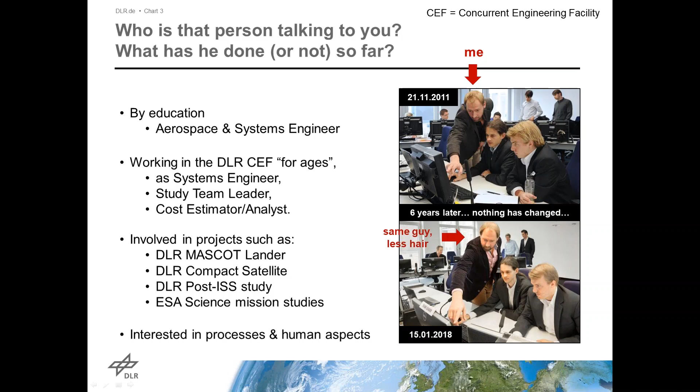Personally, I participated in approximately 50 studies in different roles, such as system engineering, team leading, or moderating, and as just said, more and more also cost estimation. And projects which I had the luck and honor to participate in include, for instance, the MASCOT landing package, which ended up being part of the JAXA Hayabusa 2 mission, which landed on October 3, 2018, which was German Unification Day, basically. And since 2 of my research interests are also engineering processes and human interactions, I sometimes feel inclined to compile such observation-based papers to look not only on the technical side, but also on the people-related aspects.

A few words on the German Aerospace Center, or in short, DLR, for those who are not fully aware of this organization. Here's a map of Germany with all DLR sites and centers presented. The number is constantly growing. DLR is somewhat similar to NASA, but smaller, of course, and comprises the German Space Administration, which is actually only a small part of it, and many R&D centers dealing not only with space, but also aeronautics, transportation, energy, digitalization, and security. We have more than 9,000 employees, more or less, and about 150 of them are sitting here in northern Germany, in Bremen, where the Space System Institute is located.

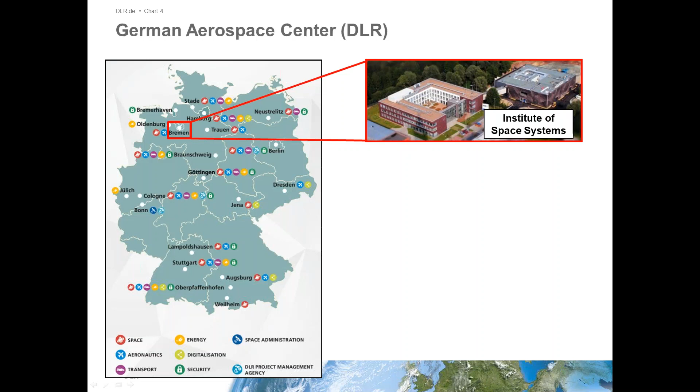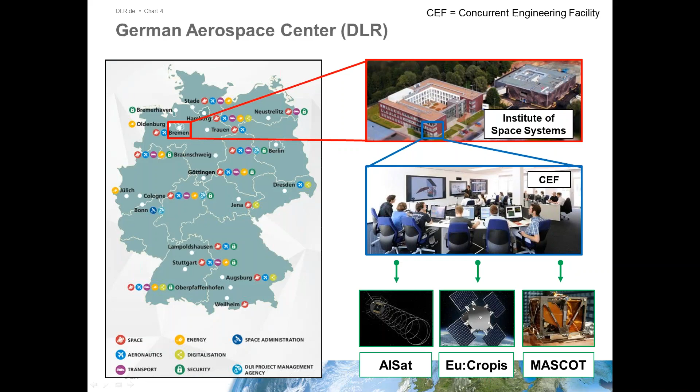And this place also then hosts the Concurrent Engineering Facility, which looks basically like an operations center, but it's mainly used for mission definition studies and not at all for launch or satellite operations. Not all of our projects use the CEF, but many do. Several of these studies aim to investigate future potential missions, to identify, for instance, feasibilities or come up with a preliminary design. Some projects end after such a study, since they lost competition against other missions. Some end due to lack of funding. Others are put on hold because they're too fancy to realize right now. But some turn into reality, such as the presented here, AISat, the Eu:CROPIS compact satellite, or the just mentioned MASCOT landing package.

But well, why setting up a CEF, and also why using it? As many others did before us, especially in NASA and ESA, we also wanted to reduce the, let's say, typical communication barriers, which are unfortunately standard during regular office-to-office communication. There's also plenty of definitions about concurrent engineering as applied in space engineering, but in short, it's no magic.

The idea is essentially to put everyone into one place, co-located, or these days maybe also virtually, and establish a structured and moderated communication process in which all subject matter experts or domains should mutually exchange their design progress to the entire team. It also facilitates parallel working while maintaining a clear share of responsibilities, and it's very useful in early stages, but can also be applied to later phases to a certain extent.

And well, why are we doing this? As you know, space systems tend to be very complex, often unique products. They're also comparably expensive. And to build the product right, and also actually to build the right product, you should involve everyone in the design process right from the start, and make sure that there's a common understanding and also a common data set to be used by everyone.

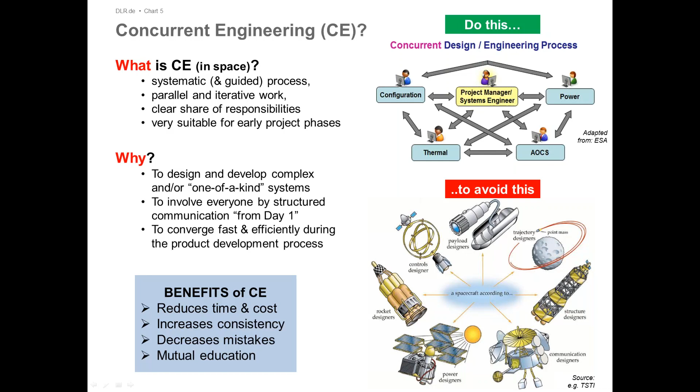And in the end, it all comes down to communication, which then leads to a reduction of time and costs and increased consistency, less mistakes, and also a nice side effect, mutual education. So you learn a lot from others.

On our side here at DLR, it is done by considering the so-called 4 major elements or legs of concurrent engineering, which is the people, of course. It's the most important one. It includes the customer, the design teams, and everyone who has a relevant stake in that mission. It's supported by a guided process, which is managed by the so-called team leader or moderator.

It makes use of an infrastructure. In our case, it's the CEF. And also very important, a central data model, which is a tool or software which acts as a single source of truth and ensures a smooth data exchange amongst the disciplines.

The CE study itself, which on DLR side usually lasts about 1 full week, so let's say average working week, is the central part of the overall study or overall activity, which is framed then by an initiation and preparation phase, in which expectations, requirements, and first design options are defined by the core team, not to waste time of everyone else, and also by a later post-processing phase in which the CE study results are harmonized and documented.

The study phase itself consists of several plenary sessions where the entire team participates in the discussions, and also so-called offline sessions during which the team members can work on their own design, do their homework, so to speak, or discuss particular issues and trades in smaller groups.

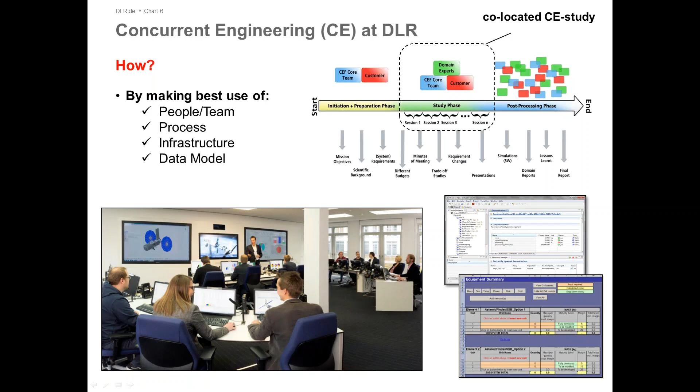For the data model, there's plenty of options. There's commercially available ones, company-tailored ones, some provided by agencies, sometimes self-made in Excel or using more sophisticated software. But the overall goal for all of them is to ensure that everyone works with the latest set of data and that you have basically also simultaneous access to that data.

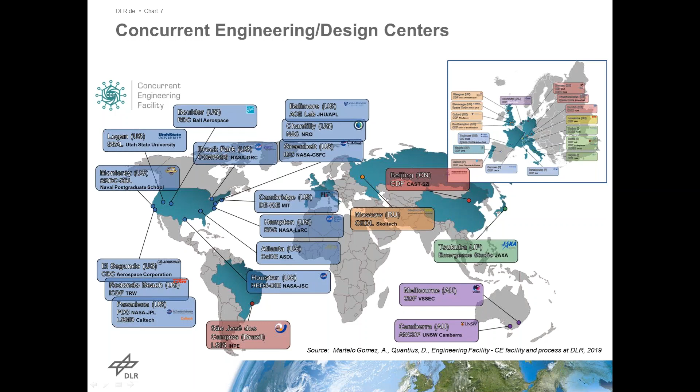Of course, we're not the only ones in the spacecraft community with such an environment. There's plenty of other concurrent design centers worldwide with industries, agencies, R&D institutions, and universities using them. And also here, the number is growing. This is a map one of my colleagues put together, which I'm allowed to share with you. I guess maybe some of you have already worked within such an environment or have at least heard of or seen one.

Since every entity adapts the concurrent engineering methodology to their own needs, there's also many different approaches. We at DLR use it for several applications, project stage-wise, very early, not so early, option selections, or point design. But for all of them, we typically follow a 1-week approach with 5 plenary sessions, which often represent 5 design iterations.

The European Space Agency, for instance, in their concurrent design facility, they are spreading the sessions over the course of several months, with sometimes having only 1 or 2 sessions a week, which gives them in total a bit more time. And there's, for instance, the NASA Team X, one of the first applying this approach at Caltech JPL, who do, from my point of view, super condensed 3-day studies with several iterations a day.

And all of them have pros and cons in terms of required preparation status, tool or people availability, required skills, and so on. And what I can say about our approach, it's very efficient. The people, particularly the customer, are usually very happy. But I have to admit, it's also a very, very dense exercise.

So how is cost estimating done in the concurrent engineering environment? There's also difference amongst entities. Some, of course, keep the results and the work in progress confidential. We, for instance, talk about it a bit more frankly and more transparently, since we're an R&D institute. But even within one company, details of the process vary depending on the team, the partners, project type.

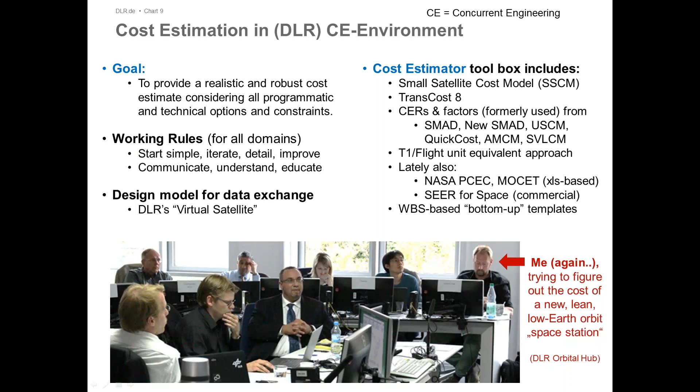Some are also very obvious, and maybe there's sometimes not much you can really do about it. But the key message I would like to bring across is the awareness. So you have to know your enemy. So the first one is wrong expectations. This is mainly related to the customers or the major stakeholders, because depending on their background and interest, the expectation of the study outcome could be significantly different from person to person.

Depending who the customer is, a project lead, a department head, or a business manager, they have, of course, different objectives. Maybe it's just a cost comparison, a detailed cost breakdown, or just a ROM idea of the cost, or something more elaborated. Normally during the preparation phase, it should be already clarified what can be done or not. But once everyone is in the same room and the study starts, I observe that the opinions might change a lot. And in most cases, all people in the end want to have a single number to take home.

So let's say this costs 100 million euros or dollars. And sometimes even before the study starts, although the design information is completely immature at that stage. There's also often the desire for bottom-up estimates or engineering build-ups. But besides the, let's say, data availability or non-availability for such bottom-up estimates, the time needed to actually set up such an estimate is totally underestimated. There's often the understanding that everyone adds their input and voilà, here's the results. Of course, this can't work.

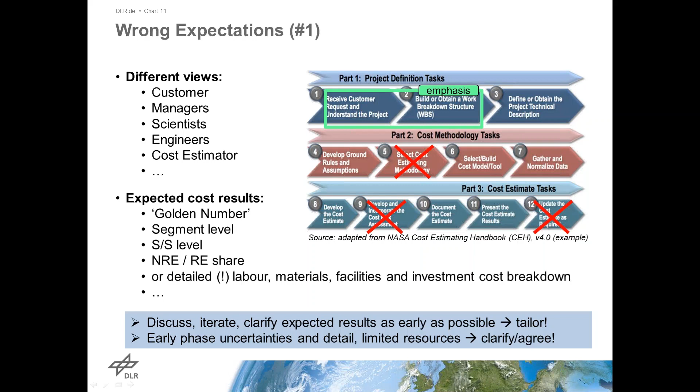So the next issue is an international multidisciplinary team. This is actually a twofold problem. First, especially in DLR and European entities, there's many nationalities within the teams. In our institute, for instance, we have 150 people. We have also 25 nations represented. This is a strong boost of creativity, I have to say, but also it comes with the burden of having to deal with different backgrounds, different personalities, communication styles, and experiences.

This really requires an experienced moderator, or makes them really mandatory, I think. The second aspect is if the outcome of the study also includes project planning and not only a technical assessment, as is the case, for instance, for a bid preparation or any other proposal activity. The question of the industry consortium enters the game.

On top of this, salary differences are also important, especially between Northern and Southern European countries. Although most of us have the same currency, it varies a lot, up to a factor of 3, comparing maybe Germany to Greece, for example. And this requires careful assessment with respect to labor rates and costs, which is actually not often well reflected in most cost estimation relationships, so-called CERs, or any other models.

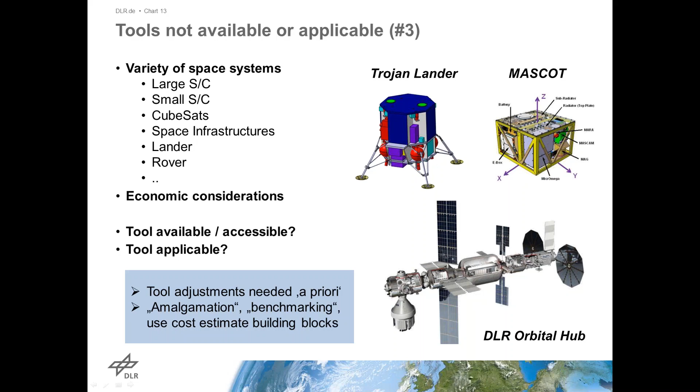Specific, or let's say ROM costs. To have an initial feeling on the ballpark cost range, using cost rates is not uncommon. During a concurrent engineering study, there's typically a day 1 or even a day 0 task. Factors such as cost per mass, for instance, can be used as a reference for sanity checks or as an initial guideline. But these numbers are sometimes subject to misunderstandings.

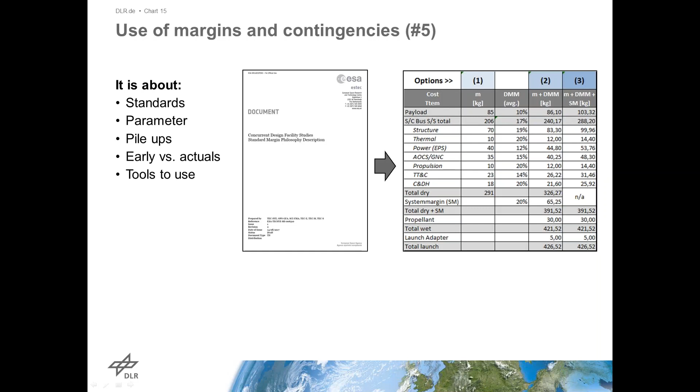Since most tools are based on actual data, shouldn't you then use the more likely actual data, or the worst case as your inputs? This would then mean that you somehow should include the 20% as well, right? So in the table on the right side, there's another column with a 20% system margin redistributed over all the subsystem masses, which is then a common input for the parametric cost models.

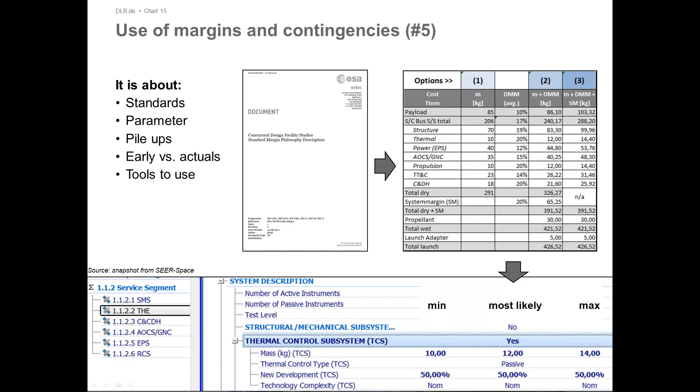And if this might be agreed, then the next question is where to actually put the data if several options exist. So if you take that column, where do you put it? There's a snapshot here from a commercial tool we're using. You somehow have to define in the beginning, and make clear during the tool selection process, which should take place prior to the study phase, the use and application of technical margins, not only for mass but also for other parameters, and then how to use them amongst tools and models. And this should be clear, documented, and definitely agreed on, because during these rapid and iterative estimation loops within the concurrent engineering environment, these details may be completely overlooked in the end.

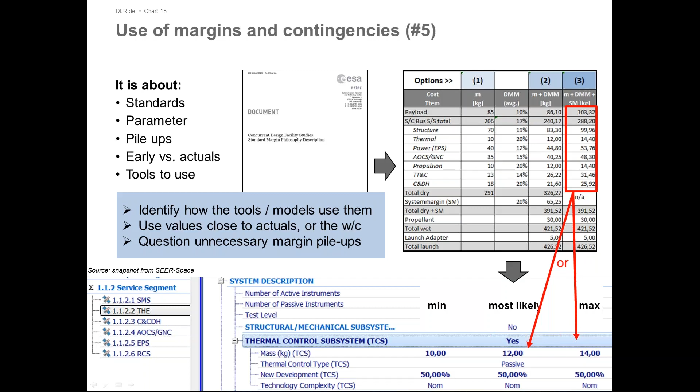Heritage and complexity factors. Sometimes they're part of a tool, sometimes they're not. Moreover, both might be very subjective and could be defined by several different parameters or design considerations, such as mass or number of units, type of units, maybe something like just software or mission aspects. On the right here, you can see an example of some compact class satellites launched by DLR or not in the last 20 years, which were supported by different partners, contractors, and also led by different teams or even institutes.

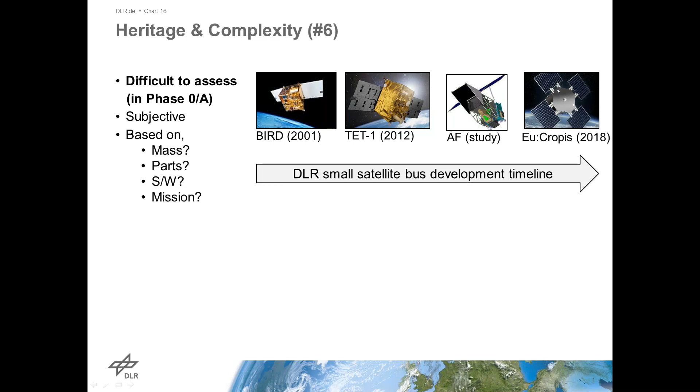For the next potential satellite in that line, how do you, from the technical and also from the cost side, assess how heritage and complexity is captured within the tool? Well, it's a very early stage, and at what level do you do this? So do you do this on system mass, on subsystem mass? How do you basically reuse the experience from a project 20 years ago in a current project? It's a very, very subjective assessment.

Again, no similar snapshot here. As said, some tools really account for this already, but surprisingly the cost impact might also be quite different. As an example, one parametric tool we use applies a factor in the 1.3 range when going from an average heritage of 50% to a fully new system. Another one uses a factor of more than 2.5. That's quite a difference.

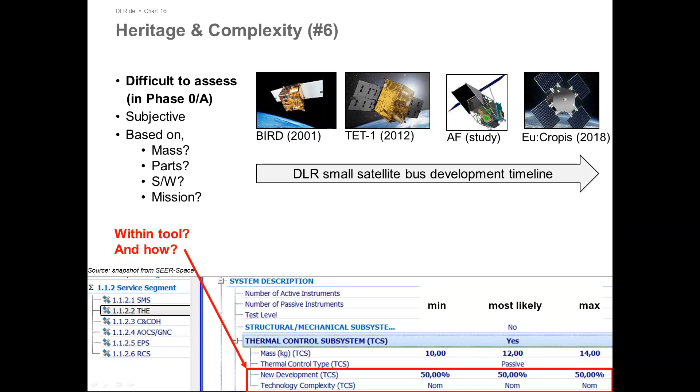In the end, you need to know your CER sensitivity to really make careful assessments. Furthermore, the input mask of the tool: sometimes they're asking for reuse percentages, other ones for percentage of new design, which is exactly the opposite. So you also shouldn't get confused with that in the hectic concurrent engineering environment.

So anyway, my experience is to save this rather subjective adaptation to the last moment, and until then make clear that this still needs to be accounted for, and that you include this in your assumptions basically at the end of the estimation process.

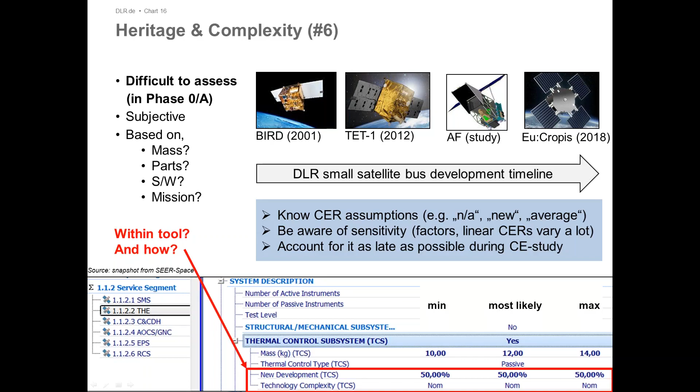So here we are. It's basically the central problem, the price you pay: lack of time. It's actually not really a specific problem, but rather the mother of all problems. There's also not much specific to tell, as it's self-explaining. Lack of time is a problem for all participating domains, but the cost estimator, unfortunately, is one of the last in the data utilization chain, and you might get into trouble before the last study session starts and finishes.

It's also clear that within 1 week, you can't really go through the full NASA, ICEAA, or DLR cost estimation process to full extent, which also might not be necessary given the early stage or the premature data. But still, there's a lot of iterations you have to go through.

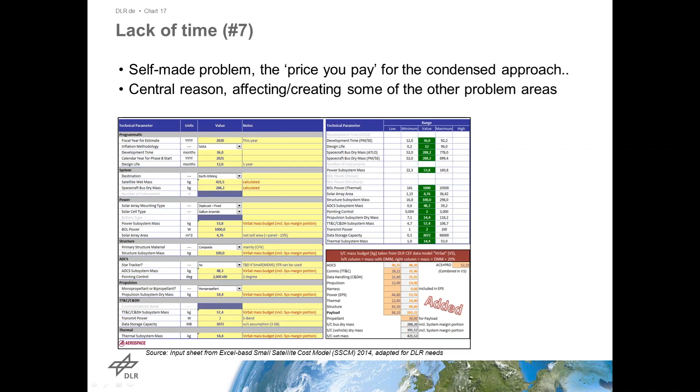On this slide, you can see another example. This time it's an input sheet of the Excel-based Small Satellite Cost Model 2014. It includes a self-made internal data input box on the lower right, which is basically a representation of the CEF central data model. And it includes also a total mass cross-check.

From there, the values are linked into the actual SSCM input sheet, and this might help to reduce some time, inconsistencies, or mistakes. It's just a very easy and simple example of how the time problem could be reduced a little bit with very easy and simple tool adaptations to iterate as quickly as possible.

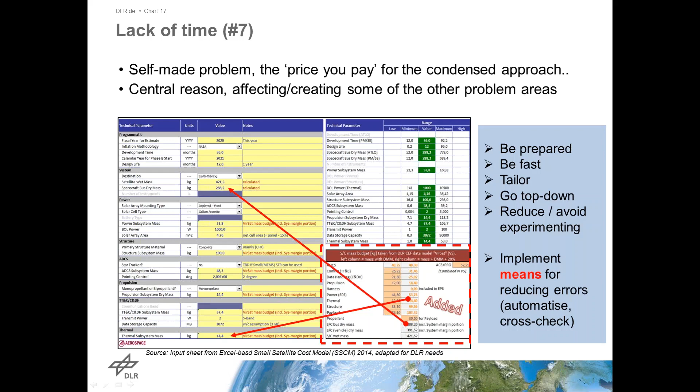So here's another lack, but compared to the previous one, this is clearly a general problem and not CE specific at all, I would say. It's the lack of data. And by data, I mean both the technical reference information, especially in the early phases for new non-standard missions, and even worse, the cost-related information.

In Europe, unfortunately, there's no good database available to the public, such as the NASA ONCE database or the CADRe documents, in which technical and cost data for different projects and milestones are captured. So we simply don't have that, or at least don't have access to it. There's also no public Government Accountability Office reports, which help to get some real-world data.

Of course, big players in Europe, again the European Space Agency, or industry players like Airbus or Thales, have their own databases, since they frequently request and receive quotations and proposals, and have also built several spacecraft. But smaller companies and research entities need to rely on either public information and/or tools they acquired somewhere, which are based on such data, which they do not have themselves in detail.

Again, you need to do your homework beforehand, collect as much information as possible, and identify the information gaps, know the unknowns. This may help to put together a good estimate later by using cost building blocks from both available and applicable CERs, maybe also from other systems with similar equipment on board, which can then be used in combination with an average cost breakdown percentage on subsystem level. So in this case, mixing recipes with a bit of freestyle, so to speak, is one way to go.

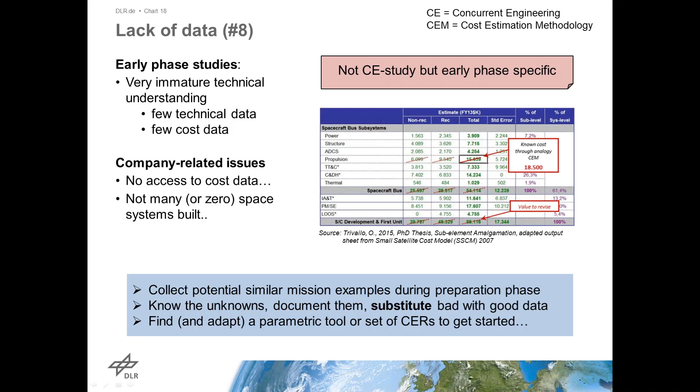So different trades, decisions along the way, tool utilizations from the domains, design improvements, but also the attitude of the team members on how they use these tools or the central data model may lead to a constant up and down of the data, hopefully converging towards the end. The rapid data changes set one of the major requirements on potential cost estimation tools, which is to be easy to update.

However, the cost estimator cannot perform all updates every time the inputs are changing, especially not in the beginning of the study. Furthermore, it also helps if the cost drivers from both the technical side, but also from the potentially used CERs are already well known. It's good to know what parameters to track and what to ignore at first. But ideally, the technical data would be automatically linked somehow to the cost methods and tools.

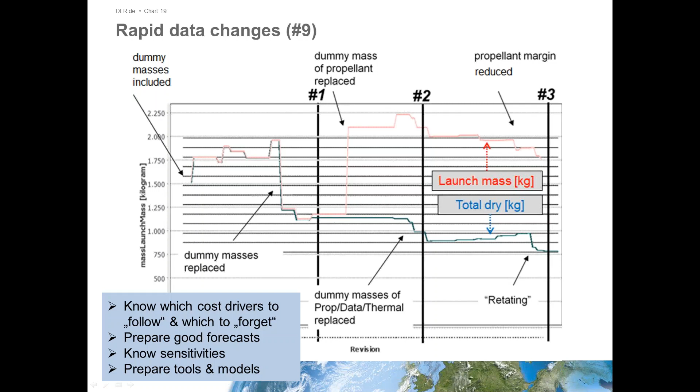But unfortunately, one additional problem is the disconnection to the central data model. One strength of concurrent, but also any other model-based system engineering approach, is the use of a central data model, which acts as a single source of truth. At DLR, as I just said, we use our own Eclipse-based Virtual Satellite tool, which includes several features, such as mass budgets, power budgets. There's different modes. You even can have distributed computer-aided design or functional diagrams.

Of course, they also capture margins, but this tool does not do trajectory analysis or come up with a dynamic power profile, and also, of course, no cost estimate. However, some data models enable interfacing to most prominent domain-specific tools, such as 3D design tools. In Europe, it's CATIA, for instance, or the well-known Systems Tool Kit, formerly Satellite Tool Kit from AGI, which is used for orbital analysis. But for cost models, there's not much out there as far as I know.

And this means you either need to include your own equations, your database into the tool beforehand, which is a lot of work, and you never really know whether you will actually use that data. You maybe develop your own plugins, or you simply continue taking values from or to the central model manually, if you do this at all. This is, by the way, not only a technical shortcoming, but also a confidentiality issue, because sometimes people just don't want cost or sensitive information like that within a model.

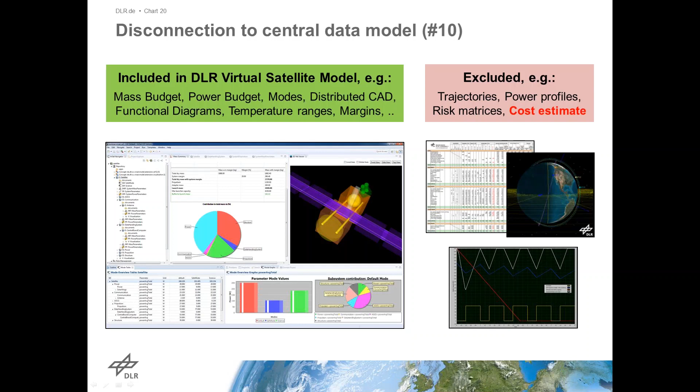Well, better having a disconnected central data model than no common data model at all, as is still the case for many traditional project approaches where spreadsheets are still sent back and forth by email. But the cost domain just doesn't benefit as much from the data model as some other domains do, such as systems, which make use of all the budgeting, or thermal or data handling, for instance, which also receive a lot of inputs prepared or pre-chewed already from that model.

So if possible, if such a function exists, subscribe within the data model to the most relevant parameters to you, and also use very robust assumptions to account for the initial changes or changes you might not be notified of because of the tool environment. And clearly, cost in model-based system engineering is very, very underestimated. As I saw, there was also a paper related to that topic in the ICEAA workshop program planned, but since it was canceled unfortunately, it has not been presented.

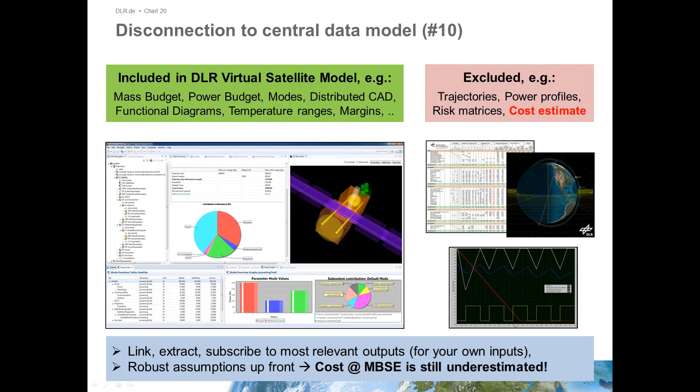The next problem is the bottom-up estimates to be done during concurrent engineering studies. Obviously, since we are talking here about mainly early stage projects, it's typically not very suitable for early phase design, but often wanted by several of our customers because they just know the templates they have to hand into project planning and program management, and so they really would like to have the details very early on. As I also said, remember the wrong expectations. But unfortunately, the effort and risk of compiling such an estimate is simply not understood sometimes. But that's also not the only aspect.

Also, the subject matter experts, so the design team, are often not familiar with parametric estimates, and they also might not trust such tools and the data behind them. So they have more experience providing engineering build-up cost assessments for their own work package descriptions. But this then leads to several other sub-problems. If someone is not able to provide such a cost estimate on unit or subsystem level, the estimate has gaps, obviously. If no model philosophy or test approach is defined, which is likely the case in pre-phase A, how can anyone come up with a meaningful assessment on labor or material costs for the system qualification activities?

Besides, there's also a strategic element. Some people tend to estimate at the very lower end to increase the likelihood of funding. Some others at the upper end to already claim their, let's say, comfortable budget, just in case the project continues. So doing these types of estimates, if this is really wanted or required, the way people shall contribute to the assessment really needs to be commonly agreed on.

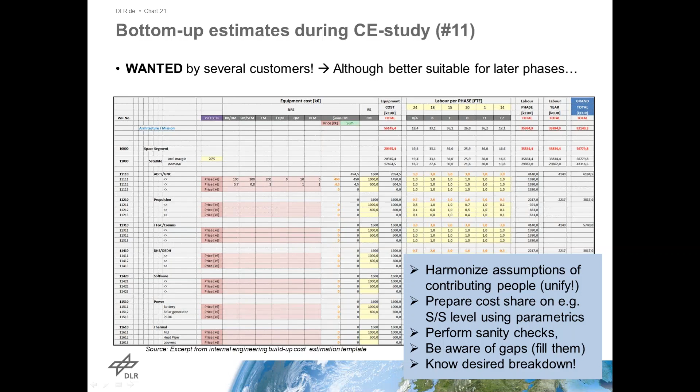One week of highly intense design iterations is tough. So you should not waste time by optimizing the wrong end of the estimate. So let's have a look here at the standard NASA level 2 work breakdown structure. For a spacecraft design study, work packages 6 and 5, so spacecraft and payloads, usually receive the most attention, especially within a room full of subsystem engineers.

There aren't many tools which cover all work packages. But for instance, the latest version of a tool called QuickCost, developed by Hamaker, focuses as well on work packages 5 and 6, but it also provides average percentages, which can be modified for most other work packages too. And it also has the option to add a factored or a manual input for work package 8, which is launch cost here. However, an average mission still puts 60 to 80% of the total cost on the space segment, with all other work packages sharing the rest.

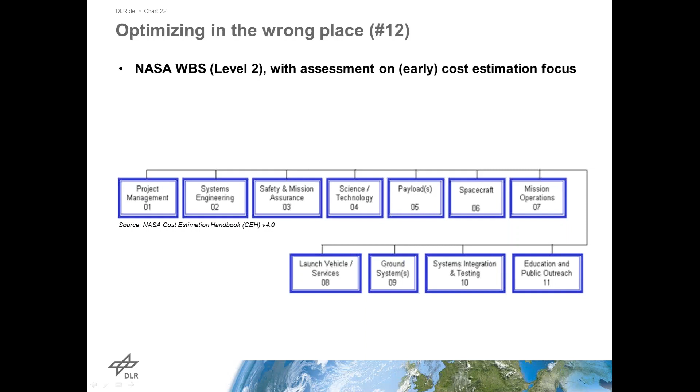But not all missions are average. For long duration science or interplanetary missions, the operations costs may be huge. And human missions clearly need much more safety and mission assurance than other missions might. So according to my experience, as I said, it typically focuses on the spacecraft. Work packages 3 and 10 are clearly underestimated. You never really know the low or high percentage of the launch vehicle. How does that affect the overall assessment? And mission operations really depends a lot, but it's often not considered as much as it should be.

And unfortunately, sometimes some work packages are even completely neglected. This is often the case for science and technology efforts, so what to actually do with the data later on, and also for education and public outreach. So what can you do? Understand the mission, understand the drivers. Do not iterate yourself to death figuring out maybe a mass memory cost while a completely new ground station has to be built, or while extreme testing is required for a super detailed interplanetary mission, for instance. So balance the details, and again, know your CER sensitivity in case parametrics are used. And don't forget the 80-20 rule.

So finally, there can also be lack of acceptance due to lack of time, interest, or understanding of your teammates or managers. This may lead to some of these statements presented here, especially if you're not quietly sitting with the experts in their office alone, but with a bunch of technical people in one room altogether. A room in which, by the way, fresh air is a limited resource at the end of each day.

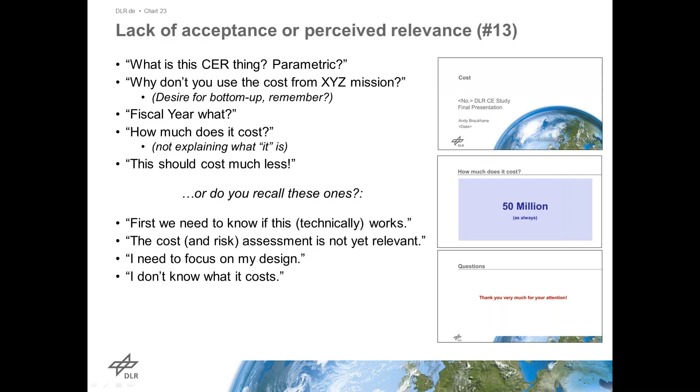So I put a ridiculously high number with no explanation at all. And in the end, everyone woke up. And then I started my real presentation, explaining everything: what methodologies, at which stage, and so on. Where do I have the numbers from? And suddenly there was interest.

So concurrent engineering studies are a great place, or better a great occasion, to work together, to learn, but also to explain, educate, and clarify, and to play with the audience if needed. And if you did a good job and no one cares, well, just take it easy.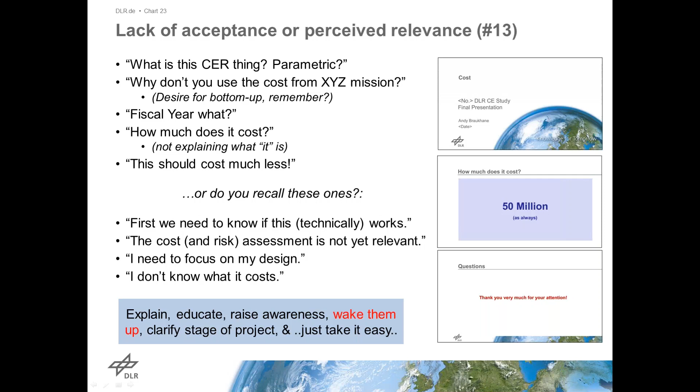Plus, another, let's say, mini conclusion is that the problems 4, 5, and 6 relate to the specific costs, margins, and also heritage and complexity. It seems that they're rather isolated problems compared to others, and also not very concurrent engineering specific, but general issues. In the actual paper, which you can also download, I've tried to cross-reference the major mutual influences within the subchapters, so you may have a look there for the details.

Anyway, in summary, it can be said from my personal bias, but also long-term experience, that applying concurrent engineering for complex projects, in our case space mission related, particularly in early phases, is highly recommended. It has a lot of good elements such as time reduction and also quality and consistency increase. But it needs to be understood that all people, including the cost estimator, are facing a couple of challenges. Amongst others, the low design maturity, tough schedule, many technical people, so not everyone understands the other people's work and decisions, and there are sometimes also very different cultures and expectations you have to consider.